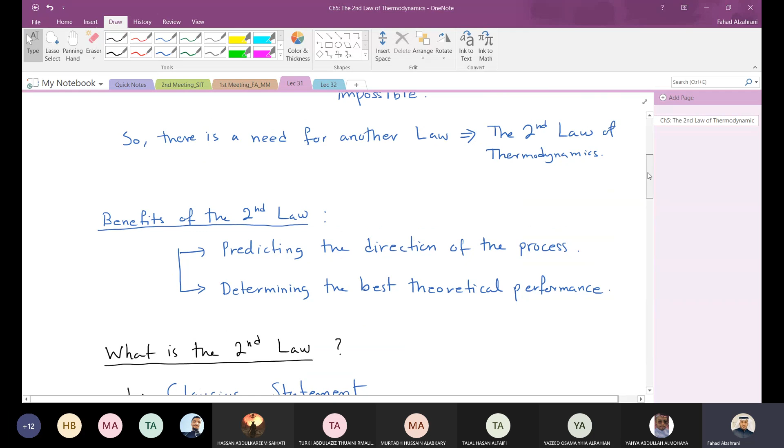Last time we introduced the second law of thermodynamics, and we said the first law is not enough to determine the direction of a process or whether this process is possible or impossible. And also we need a law that can tell us the best theoretical performance of systems or processes.

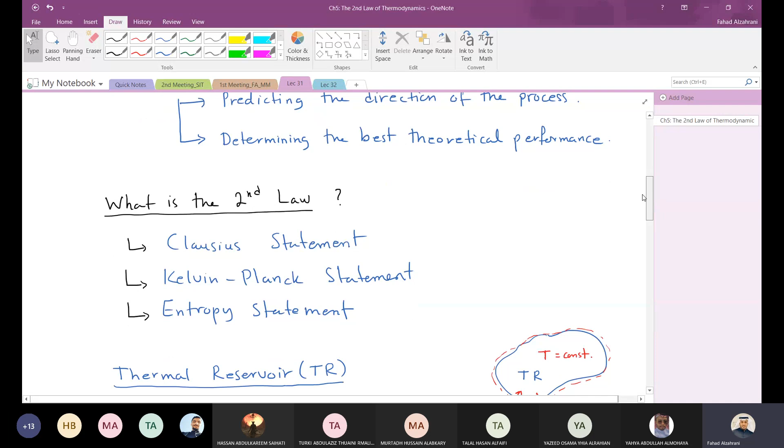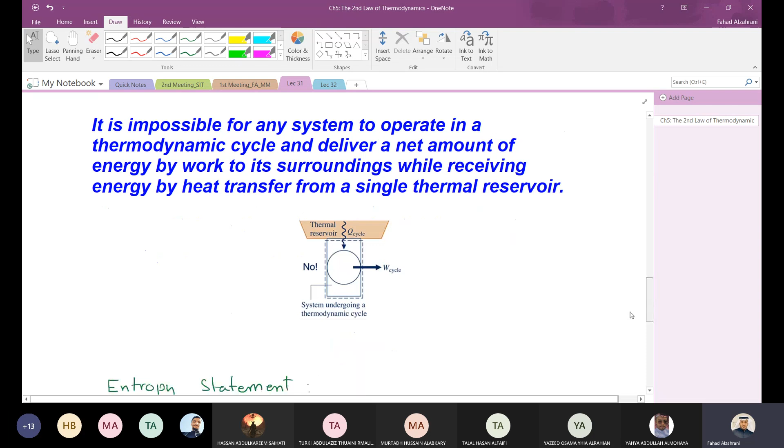And then we talked about what is the second law, and we talked about three different statements. We talked about the Clausius statement, the Kelvin-Planck statement, and then we started talking about the entropy statement. So we defined what is entropy, and today, inshallah, we'll talk about the statement related to entropy. We said entropy, you can think of it as an energy or heat that is generated by the molecules due to these irreversibility sources.

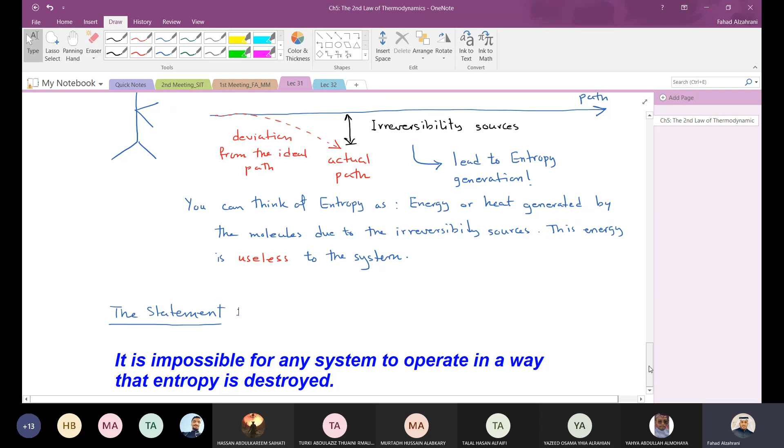We talked about maybe friction, we talked about heat transfer; these irreversibilities will cause the path to deviate from the ideal path. Okay? And then the entropy will be generated. So the statement for entropy generation is the following. This is the third statement of the second law, the entropy statement, which says that it is impossible for any system to operate in a way that entropy is destroyed.

What does this mean? Once I generate entropy, once this energy or heat is generated and it's lost, it is useless. You cannot destroy it, you cannot take it back, or you cannot reverse this process. So once you generate entropy, you cannot destroy this entropy. This is what the statement says, and this is experimentally proven in the past.

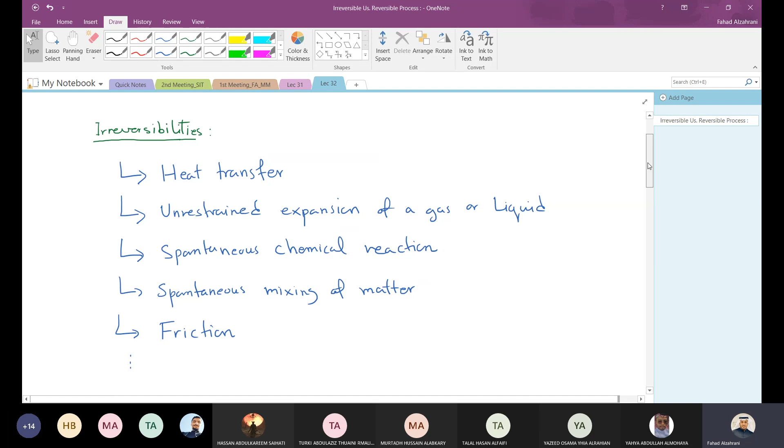Okay, we'll continue talking today about irreversibility. We said these sources of irreversibility cause the path to deviate from the ideal path, and so if there is irreversibility, we call this an irreversible process. If there is no irreversibility, we call it a reversible process. So let's talk about irreversible versus reversible processes. Before going, let me give you more examples of the irreversibility sources.

We talked about heat transfer, which is one of the most important irreversibility sources. Whenever there is heat transfer, there is entropy generation. Other examples include unrestrained expansion. If you have unrestrained expansion of a gas or liquid, let's say you have a pressurized tank, you open this tank and the gas just escapes and you cannot bring it back. This is a source of irreversibility. This causes entropy generation. Another example is chemical reactions.

So if you have a chemical reaction that you are not controlling, this is also a source of irreversibility that will cause entropy generation. Let's say you have mixing of matter, salt or sugar. You mix it and dissolve it in water. Once you do this, you cannot reverse it. The salt molecules are homogeneous and mixed with the water molecules, and you cannot take it back. You generated entropy.

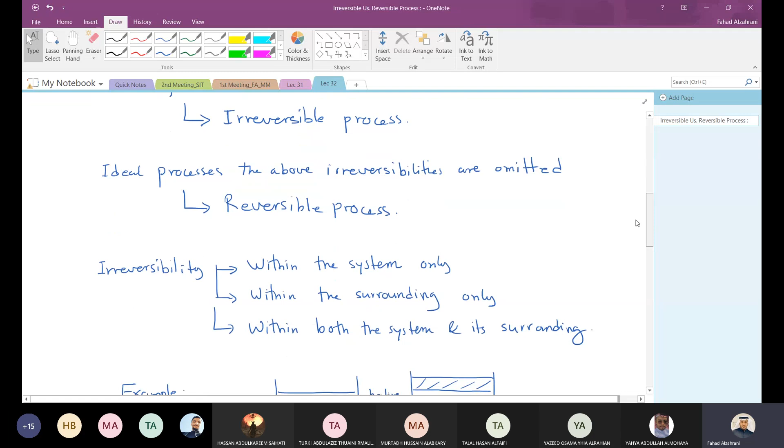Doctor, how would you change the properties of a system without applying energy? I assume if there is energy applied, there will be entropy. عيد سؤالك. How can you change the properties of a system without applying energy or work? قصدك without transferring energy. Yes. أنت جاوب. Can you do that? I think no. I think there would be always entropy due to the applied work or energy.

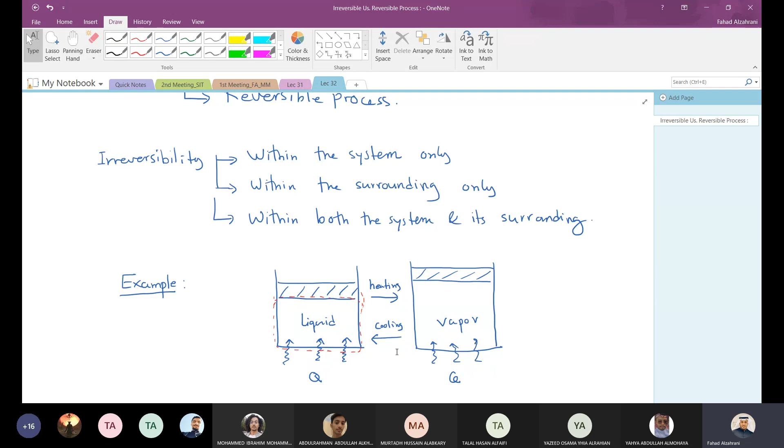معناته ايش؟ في شيء اسمه internally reversible process. So this process is internally reversible and externally irreversible, لأنه الheat transfer happened through the surrounding and across the boundary. It did not generate within the system itself. فالبروسيس هذه it is internally reversible لكن externally irreversible. And this is an important concept to understand here. Is that clear? Any questions here?

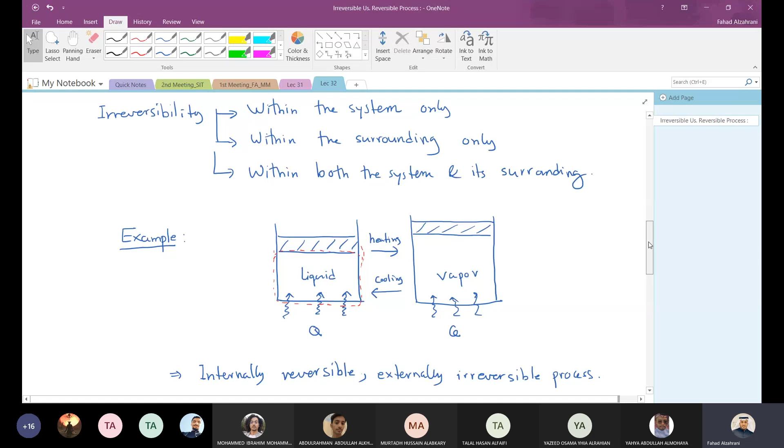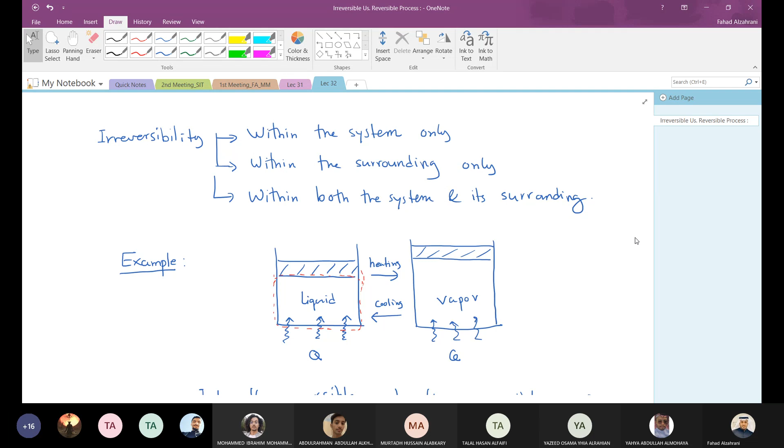عدينا نقطة اللي كنت بذكرها انه irreversibility can happen within the system only, can happen within the surrounding only, and can happen within both the system and its surrounding. If it happened within the surrounding only and the system is reversible, we call it an internally reversible process, a process where the system itself is reversible, like the example I gave you here. So this is internally reversible, externally irreversible process. Any questions?

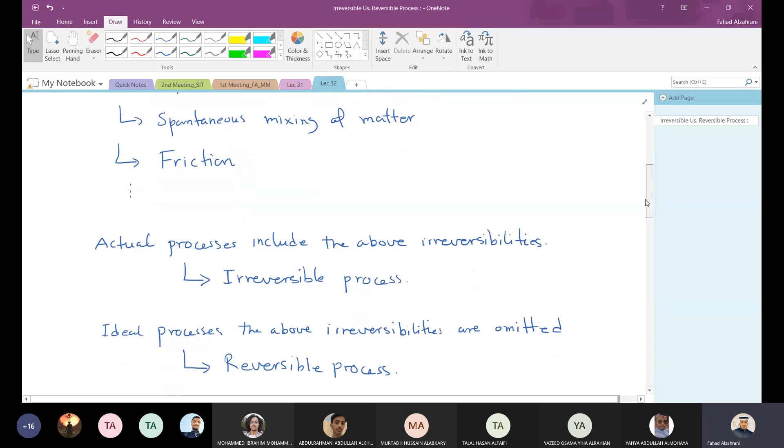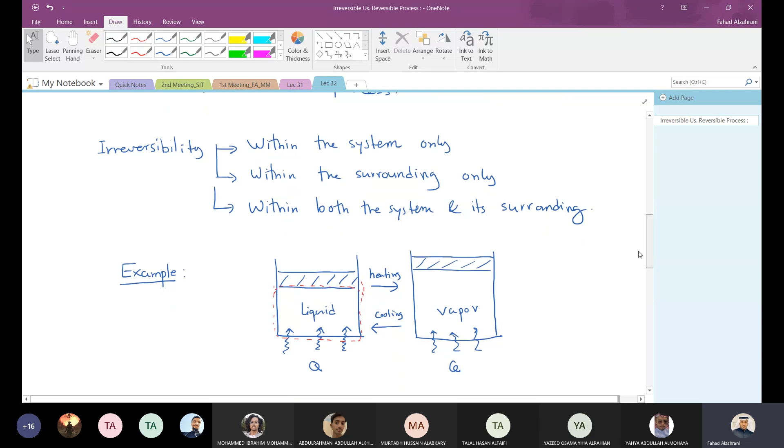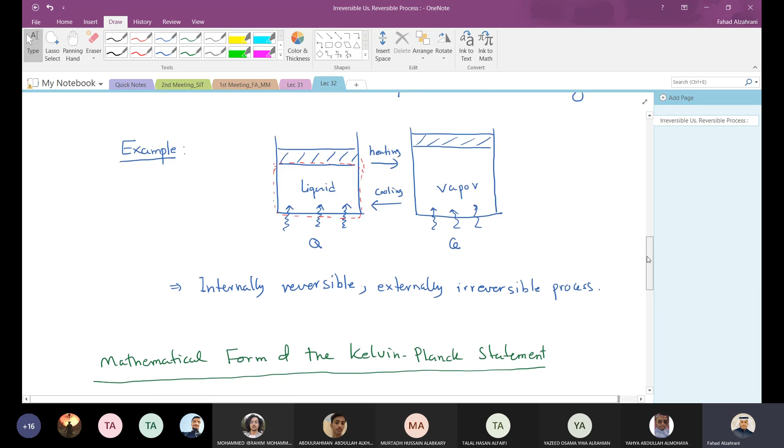واضح ايش يعني reversible and irreversible? Reversible means there are no irreversibilities within the system, and irreversible means there are irreversibilities within the system. Any questions? طيب, we would like to talk about the performance of cycles now.

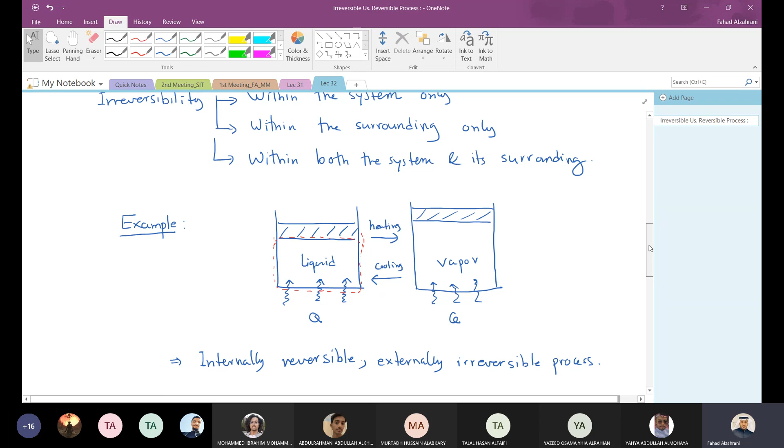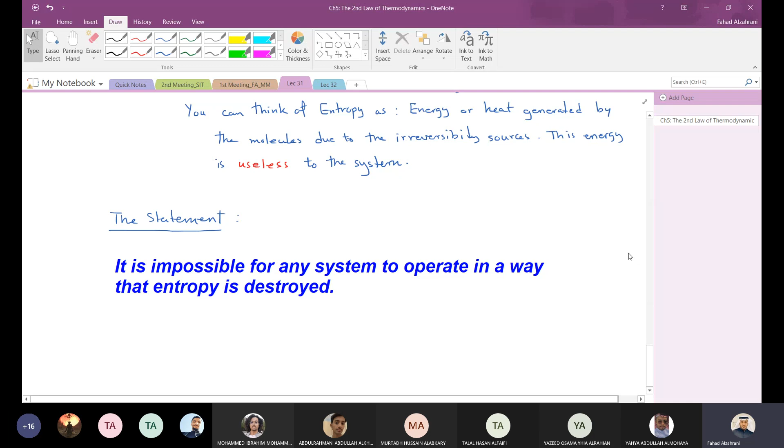But before that, let's relate the Kelvin-Planck statement mathematically to the concept of irreversibility. In the Kelvin-Planck statement, what did we say? We said it is impossible for a system going through a thermodynamic cycle to deliver a net amount of energy by work to its surroundings while receiving energy by heat from a single thermal reservoir.

If a system going through the cycle is in contact with only one thermal reservoir, it can never generate positive work. So mathematically the work is either 0 or less than 0. Based on the reversibility concept, for a single reservoir, what does 0 refer to and what does less than 0 refer to? When is the work of the cycle 0, and when is it less than 0?

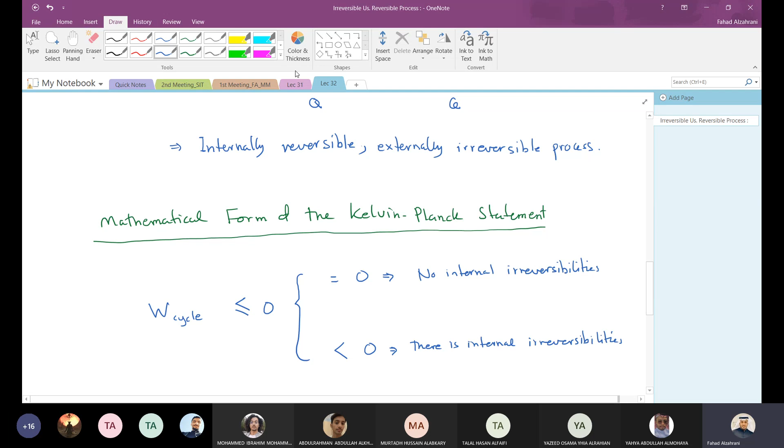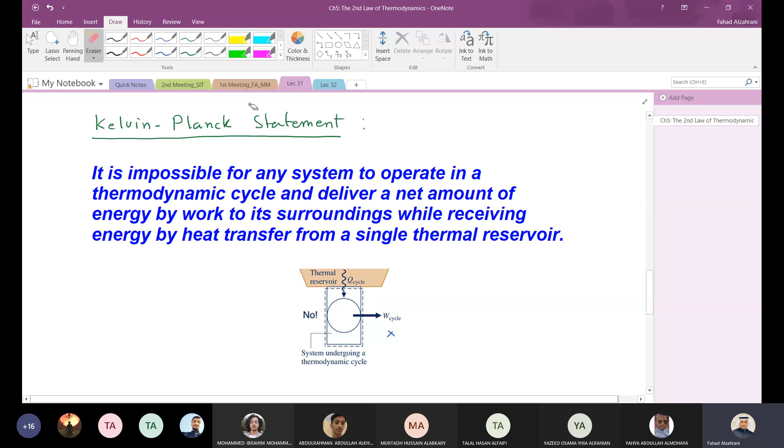طيب, let's talk now about the performance of thermodynamic cycles يا شباب. احنا ذكرنا لكم يا شباب قبل, if you remember, we talked about the 3 different cycles: a power cycle, a refrigeration cycle, and a heat pump cycle. قلنا في الباور cycle the objective is to generate power from a heat source. I have a heat input and I'm generating power.

The refrigeration cycle, I have power input and my objective is to cool a certain body, or I have a cold side that I'm gonna cool down. And the heat pump cycle, the objective for it is to use power input to heat something, heat a body or heat a certain site. Okay, so these are the 3 different thermodynamic cycles. So let's talk about the performance يا شباب of these thermodynamic cycles.

So I have what I call a power cycle and I have the thermal efficiency يا شباب. As a general rule, قاعدة عامة, if I want to evaluate the performance of anything, حتى لو مثلا موضوع جديد أو application جديد I'm trying to explore, I usually take the output and I divide it by the input.

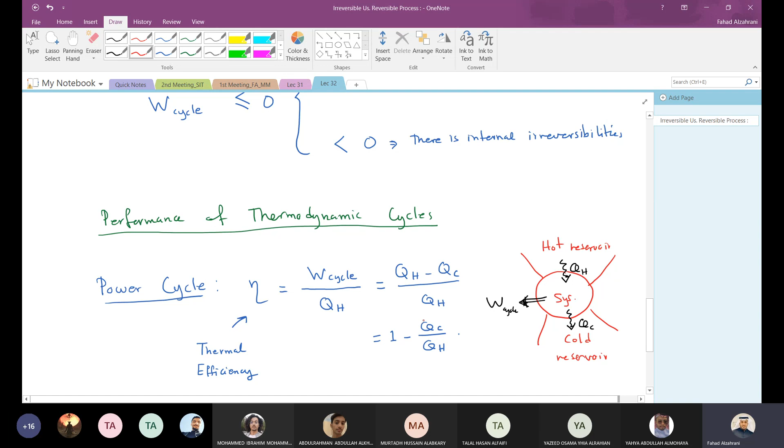Q cold 0 means there is no cold reservoir. I'm not dissipating heat to any second reservoir. وهذا الشيء حسب the second law is impossible. فبالتالي from the second law and from this equation we conclude that the maximum performance theoretically is always less than 100%. Okay, so the maximum performance must be less than 100%.

يعني مهما حاولت, if you want to generate positive work, مهما حاولت تقلل Q cold, you have to have Q cold, لأنه if you don't have Q cold, you will not have power out. فبالتالي even though you try to increase QH and reduce Q cold, your maximum performance will always be less than 100%.

واضحة هذه؟ Is this clear? اي واضح. طيب, what is the other conclusion? Okay.

Let's think about the actual versus ideal cycle. تتوقعون أو reversible versus irreversible cycle, وش البرفورمانس؟ هل بيكون أعلى للreversible أو irreversible؟ The performance, is it higher for reversible cycle or for irreversible cycle? Irreversible? Reversible will have higher performance? No, the reversible will have a higher performance.

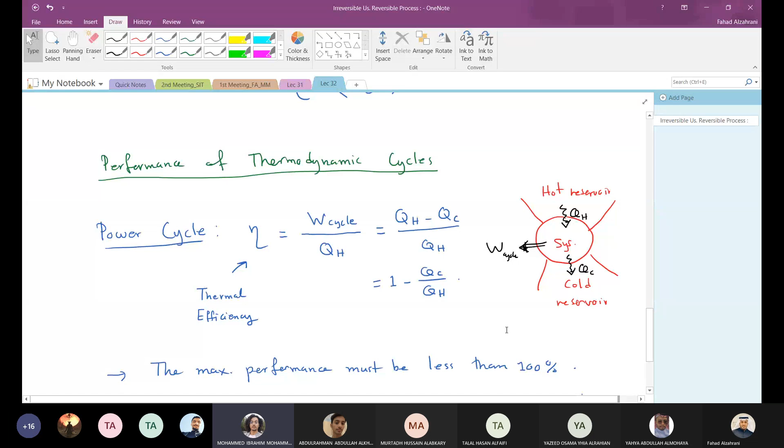Okay, so the other conclusion is that the performance of an irreversible cycle is always less than the performance of a reversible cycle. Okay, so يعني لو عندي actual cycle فيها irreversibilities, the performance is gonna be always less than the performance of a reversible cycle where there is no internal irreversibility. Okay, so this is very important.

And the last conclusion يا شباب is that تخيلوا ان عندي two cycles, each one has different objective. خلينا نقول السايكل الاول objective is to, for example, run a pump. The other one is to run a turbine, for example. It has two separate objectives. Both of these cycles are in contact with the same thermal reservoirs.

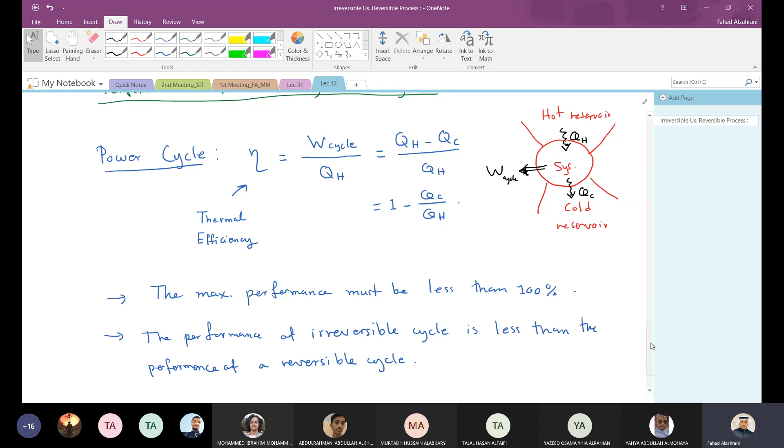في الحالة هذه يا شباب the reversible cycle performance, even though for these two separate cycles, both will have the same theoretical efficiency. So all reversible cycles operating between the same thermal reservoirs have the same thermal efficiency. Okay? So again, all reversible cycles operating between the same thermal reservoirs have the same thermal efficiency.

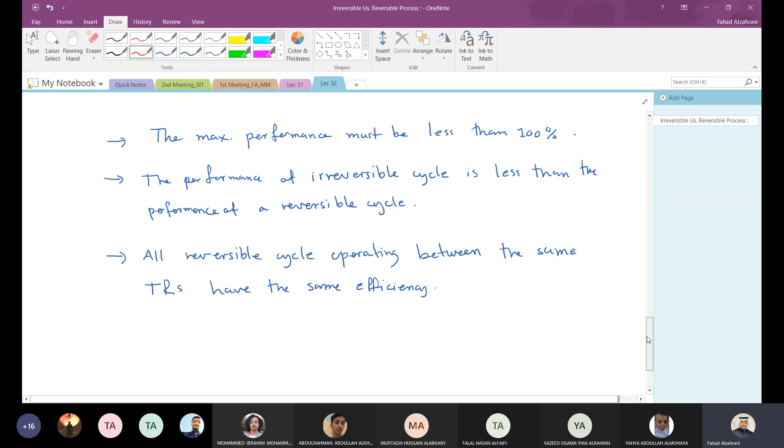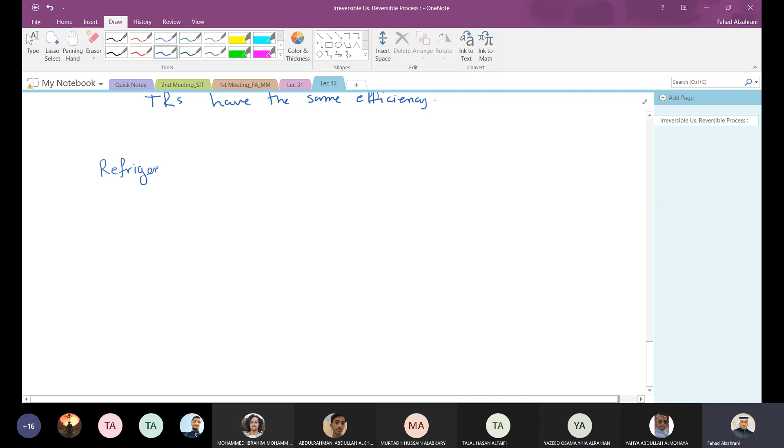طيب, let us see here. طيب ممتاز. طيب الحين we talked about this now for the power cycle. For the other type of cycles, which is the refrigeration cycle, okay, so now for refrigeration, let's write it here. Refrigeration and heat pump cycles.

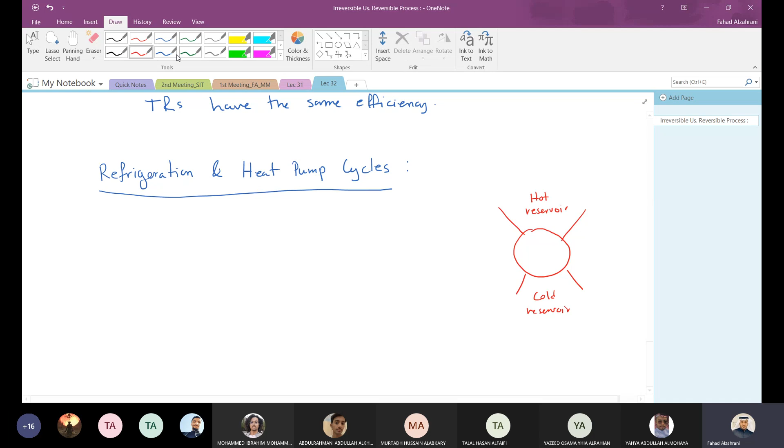Okay. So if you remember, for a refrigeration or heat pump cycle, the way the cycle works is very similar for both. So I have hot reservoir, I have cold reservoir, and I'm using power input. So I have work of the cycle as input. If it is a refrigeration cycle, my objective is to cool this cold side.

For the heat pump cycle, the objective is to have as maximum Q hot as possible by using power input for heating a certain body. So the coefficient of performance for the refrigeration, I call it beta, which equals, what is my desired output يا شباب? Q cold. Yes. Exactly. What is the input? Work. The work of the cycle.

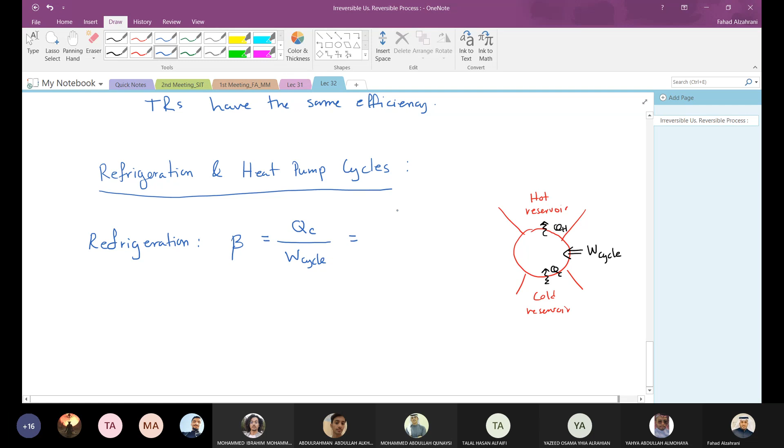And I know the work of the cycle equals the net heat of the cycle, Q hot minus Q cold. So beta is Q cold divided by Q hot minus Q cold. For the heat pump, I call it gamma. The desired output is actually the hot side. You want to heat something, over the input, which is the work of the cycle, which becomes Q hot over Q hot minus Q cold.

Alright, فنلاحظ يا شباب the coefficient of performance here depends on the output and depends on the input. So this is the coefficient of performance for the refrigeration cycle and for the heat pump cycle. طيب, similar to the thermal efficiency, we have also conclusions for the coefficient of performance for refrigeration and heat pump. So again, it is going to be very similar.

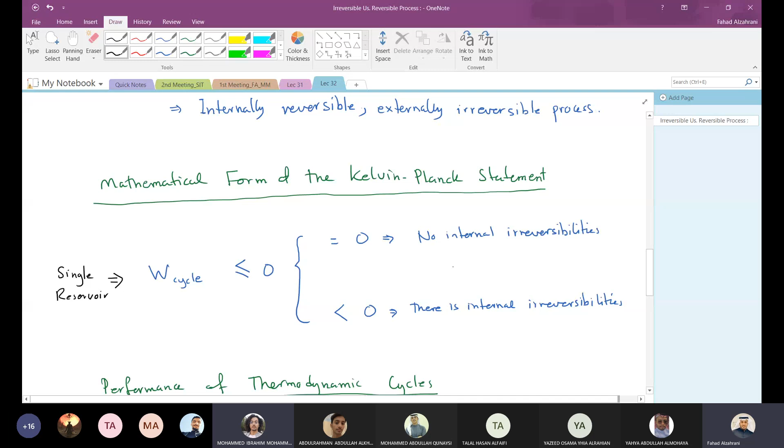Let me clarify it here. This is single reservoir. There is a difference. Okay, now it's clear. Yes. Good point.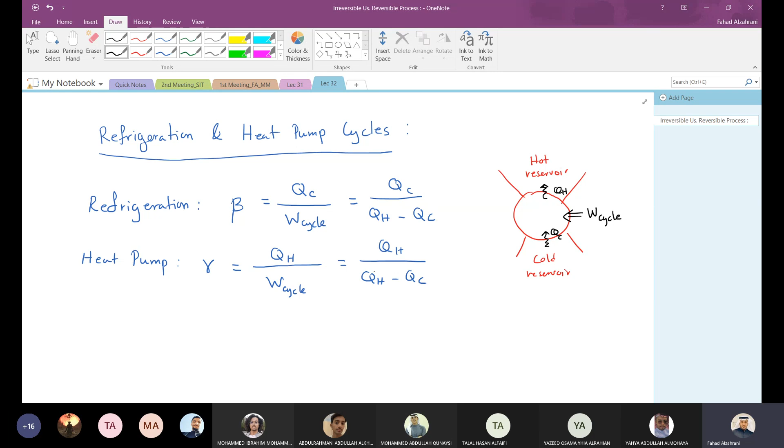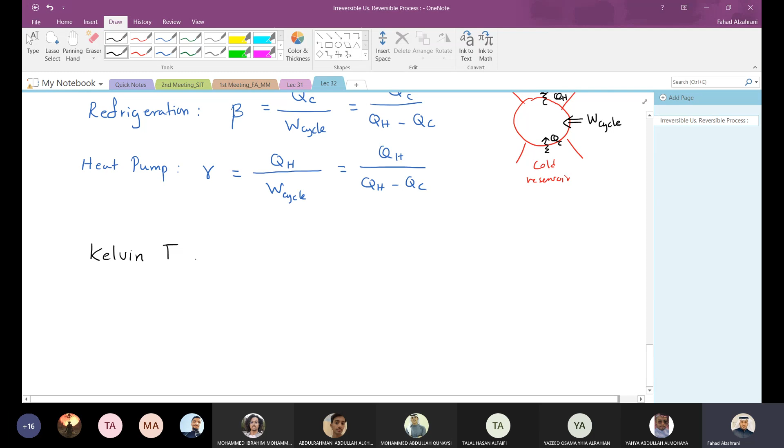When scientists did research, they found that for a Kelvin scale, they looked at the Kelvin temperature scale.

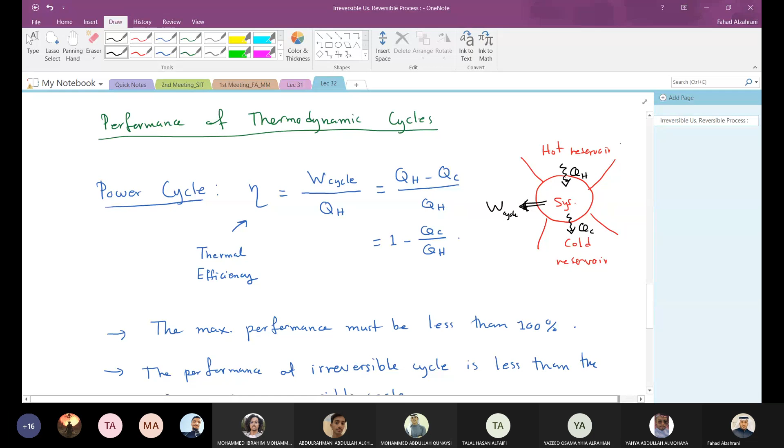When they used the Kelvin scale, they found that the ratio of Q cold over Q hot, when there are no internal irreversibilities, for a reversible cycle, equals the temperature ratio in the Kelvin scale. The ratio Q cold over Q hot for a reversible cycle equals the ratio of the temperatures of these two thermal reservoirs, the cold to the hot.

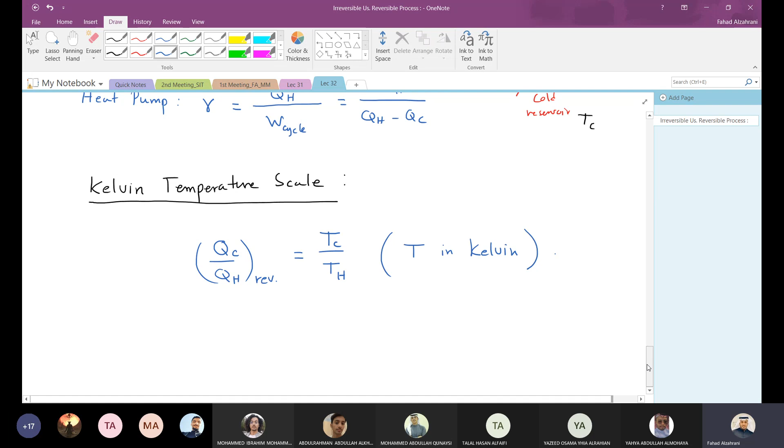So when we go back to our equations, what will the maximum theoretical be for a reversible cycle? Instead of Q cold over Q hot I will use what? I will use T cold over T hot. Exactly, I will use the temperatures for the reservoirs.

So if I give you a question with the heat transfer, Q hot and Q cold, and the temperatures T hot and T cold, can you find the actual performance and the theoretical performance? Yes. The theoretical will be 1 minus T cold over T hot. The actual performance will be 1 minus the actual heat transfer, Q cold over Q hot.

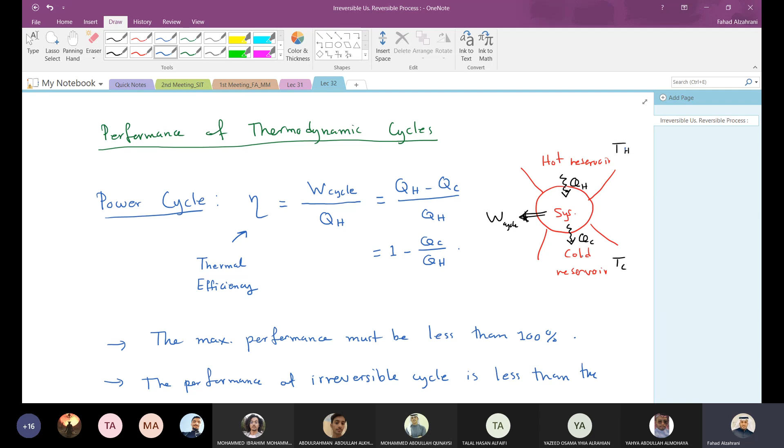If Q cold over Q hot is the same as T cold over T hot, this is the theoretical. But usually the Q ratio is different from the temperature ratio, because this is the actual cycle. To know the maximum theoretical performance you use the temperatures instead of Q. So for a power cycle the performance is 1 minus T cold over T hot.

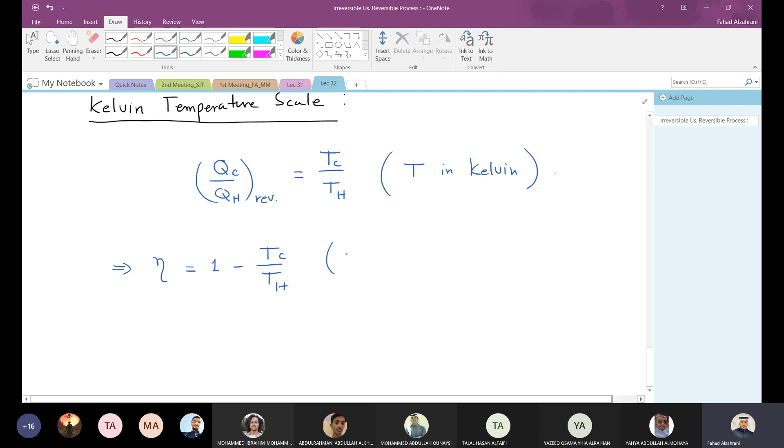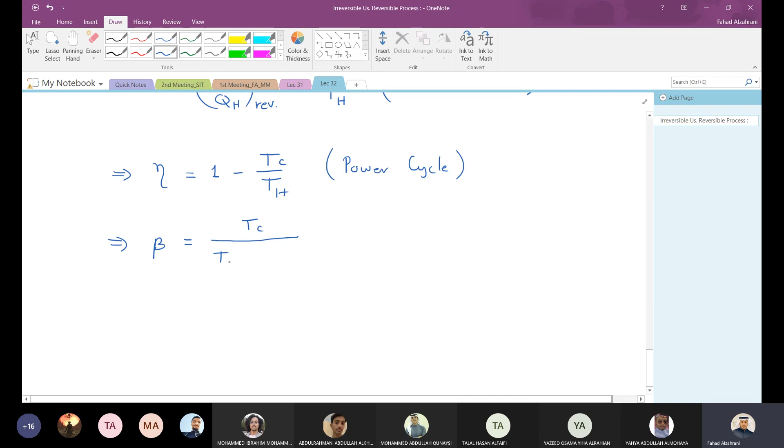For the coefficient of performance for refrigeration, we have Q cold over Q hot minus Q cold. I can divide by Q hot, then use T cold over T hot, then multiply by T hot again, and you end up with the same thing but with temperature. Math is amazing. So you have T cold over T hot minus T cold.

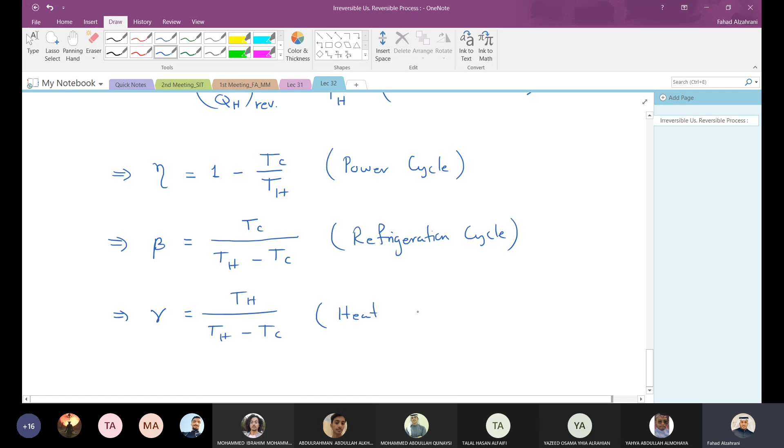This is for the refrigeration cycle, and gamma is T hot over T hot minus T cold. This is for the heat pump cycle. So these are the maximum theoretical performance.

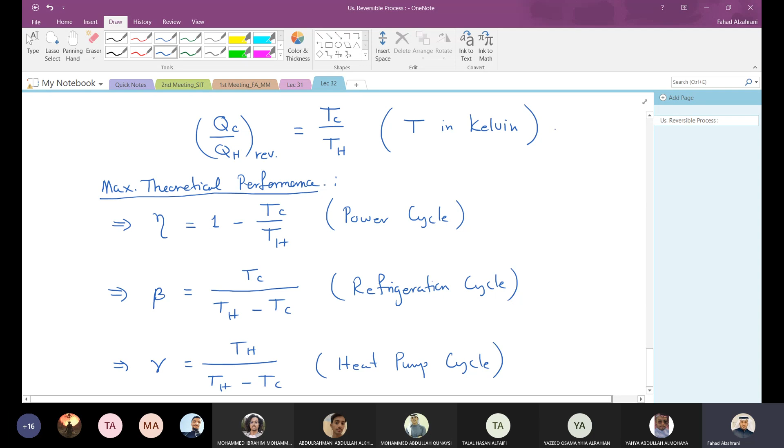Any questions here? I think this is the only calculation we have in this chapter, if I'm not mistaken. These are the only calculations we have. Okay.

There is one more topic we'll talk about next class, the Clausius inequality, which is the basis for entropy, the new chapter. Next class we should finalize this chapter. We'll talk about the Carnot cycle, the Carnot power cycle and Carnot refrigeration cycle, an example of a reversible cycle, and then the Clausius inequality. We'll try to finish the chapter next class. Any questions? Everything clear?